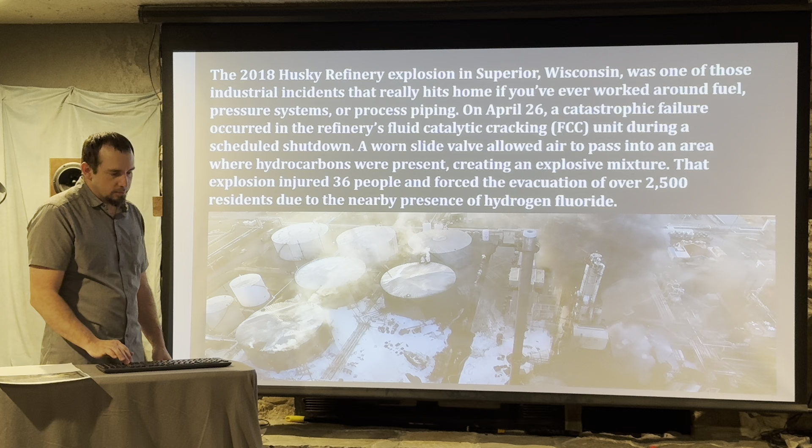I've identified 6 safety system factors: transient operation safeguards, process knowledge, process safety management systems, industry knowledge and guidance, brittle fracture during extreme events, and emergency preparedness.

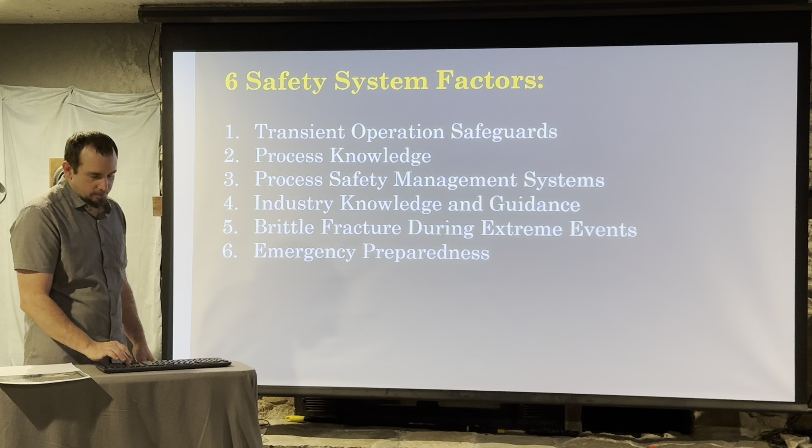Transient operation safeguards. The maintenance operation that was taking place was a manual shutdown and relied on 2 slide gates to seal off the air from the hydrocarbons. And as you can see, one of those slide gates was severely worn and wasn't the proper valve to isolate this kind of system.

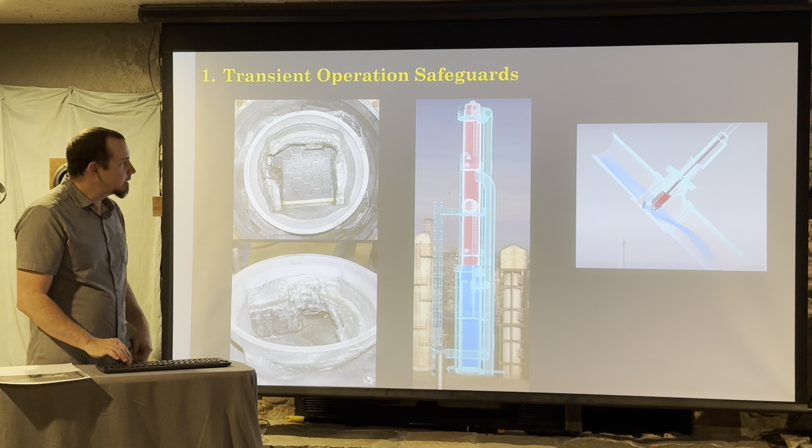Process knowledge. The FCC expertise was in-house only. Little outside expertise to give guidance on best practices. Keeping the regeneration tank at a higher pressure than the reactor, and that's noted down here. Always keeping the regeneration pressure a couple of pounds higher than the reactor pressure.

Not sufficient knowledge to realize that this practice was unsafe, and provide updated training on these activities and processes. Recommended to develop and implement a technology sharing / best practice among American refineries.

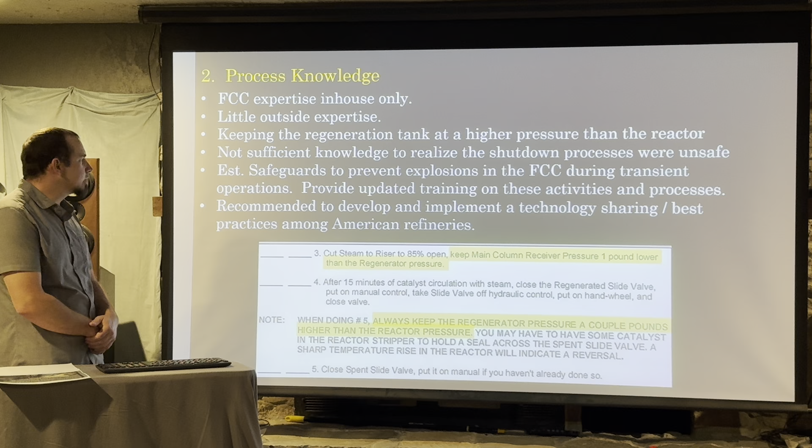Number 3 is process safety management systems that ID, evaluate, and control hazards. They did not include the operating manual. They didn't include the ID of hazards for transient operations or how to control them.

Not technically evaluated. No training to shut down safely, and the recommendation to OSHA was to develop guidance documents for performing hazard analysis on operating procedures to address transient operation hazards with respect to PSM covered processes.

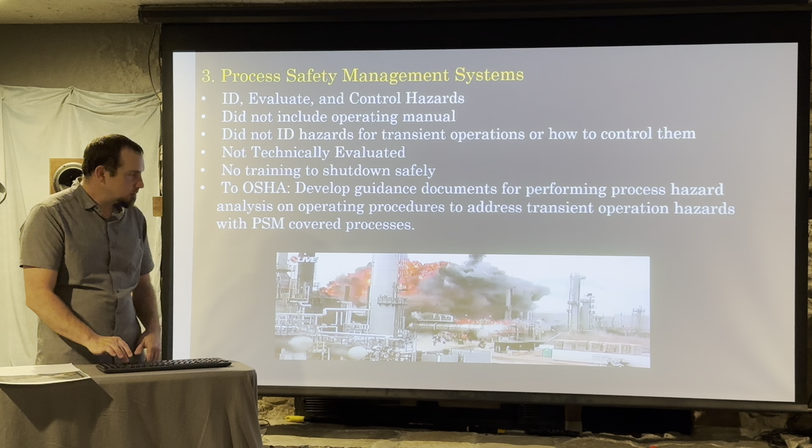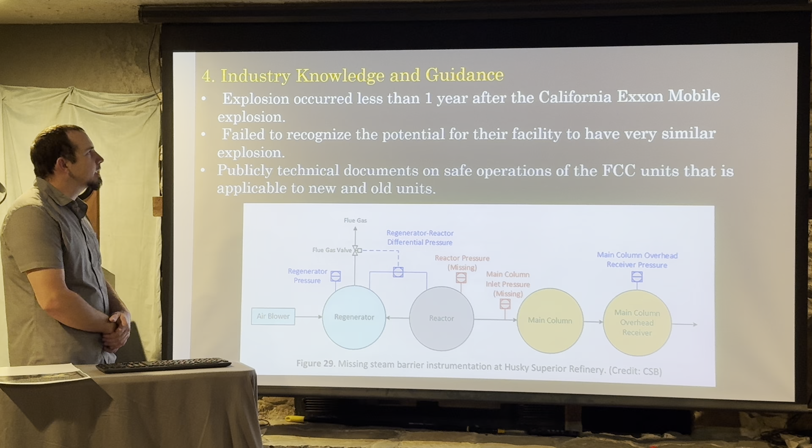Number 4, industry knowledge and guidance. Explosion occurred less than 1 year after the California ExxonMobil explosion that had a very similar failure mode. Instead of air going into the hydrocarbons, it was hydrocarbons making its way into the air. Failed to recognize the potential for their facility to have similar issues publicly.

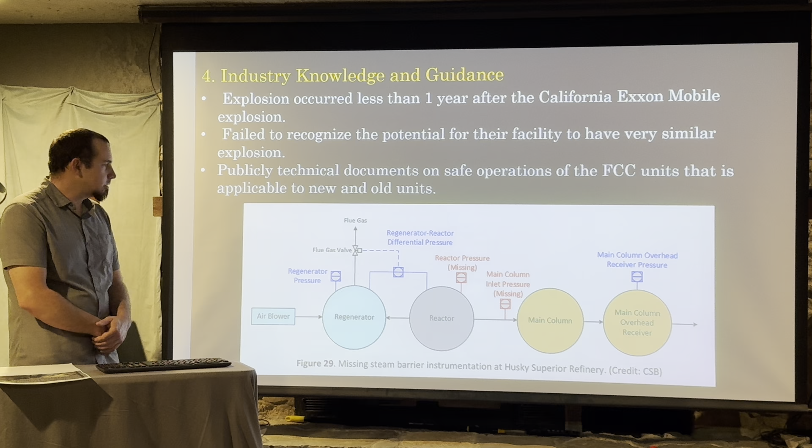Technical documents on safe operations of FCC units that are applicable to new and old units. As you can see in the bottom, there's some missing pressure transducers that would have allowed them to monitor the system better.

Number 5, brittle fracture during extreme events. Multiple initiation sites were observed. No evidence of pre-existing cracks. And fractures tend to initiate at welded attachments or seams. So the 2 tanks that exploded did so in a catastrophic event where it just fragmented and led to the puncture of the asphalt tank.

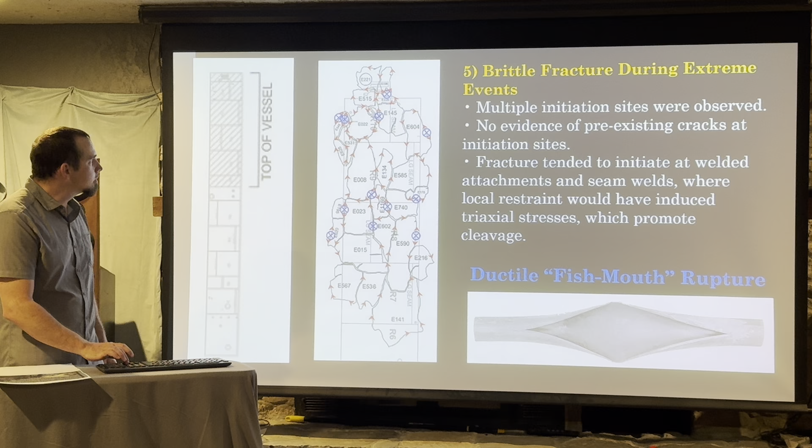New construction and materials that are required for tanks like this would have had the ductile or fish mouth rupture; still would have ruptured, but it wouldn't have had the projectile causing secondary damage. Here's a picture of the asphalt tank as it was ruptured and spilling 17,000 barrels of asphalt out into the area.

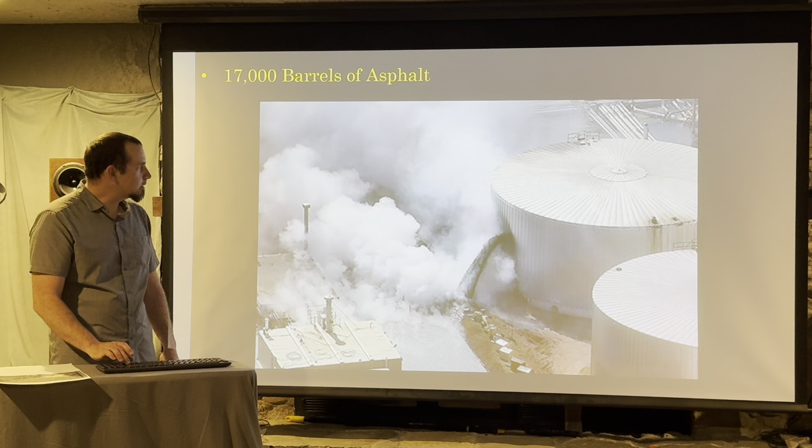And number 6 is emergency preparedness. HF storage tank was approximately 150 foot from the 2 tanks that did explode, 50 foot closer than the asphalt tank that was punctured by the debris. Of course, 17,000 barrels of leaked asphalt were not treated as flammable liquid. That would have helped with the rescue effort and not allowing that to be such a big fire.

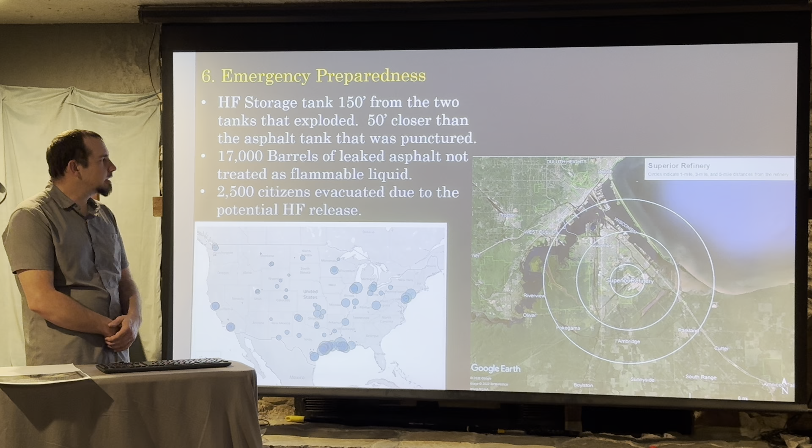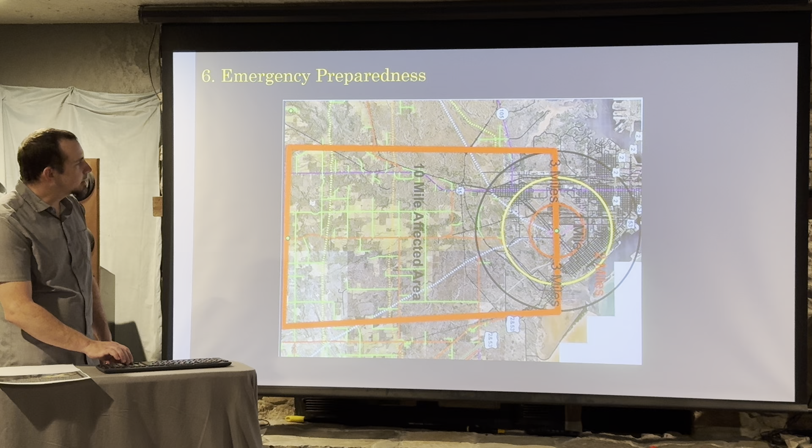And it also caused 2,500 citizens to be evacuated, and a whole town of Duluth, because of the risk of an HF exposure. And here's a better picture of what their 10-mile affected area looks like if they would have had an HF event.

And the overall cost of this safety system failure: 36 injured workers, 2,500 evacuated Superior residents, the shelter-in-place order for Duluth, which caused disturbance to the daily activities of those folks in those towns. 39,000 pounds of flammable hydrocarbon vapors released into the air. $550 million in damages to the refinery.

It was also shut down for over 4 years, and they consider this a serious near miss with the HF release.